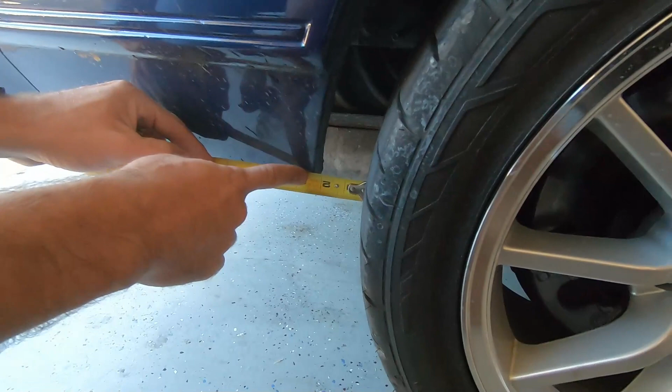So we're going to go over the diagram real quick and tell you how everything adjusts, what angles and whatnot. But first, before we go to the whiteboard, we're just going to measure the back axle real quick and make sure the angle of the axle from this way to that way is good.

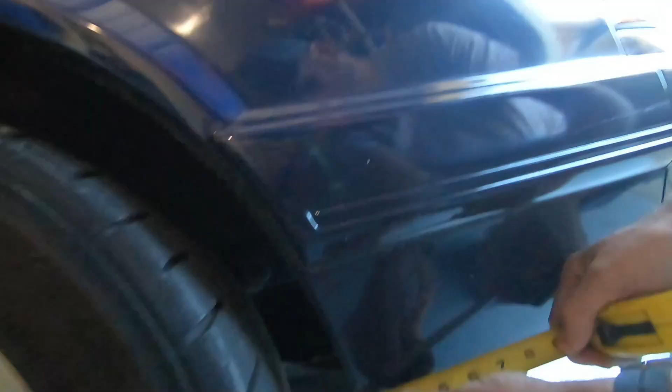I don't know if y'all can see this, but right here we've got exactly 2 1/4 from the tire to the end of the lip here. We're going to go down right where the end of the curve starts here. So we got 2 and a quarter. Let's go check the other side, Connor.

Hello. Okay, come over here, Bubba.

Okay, right here Connor, the same spot. Hey look at that, we also have 2 1/4. So just basing off these two reference points, the axle is not twisted like this.

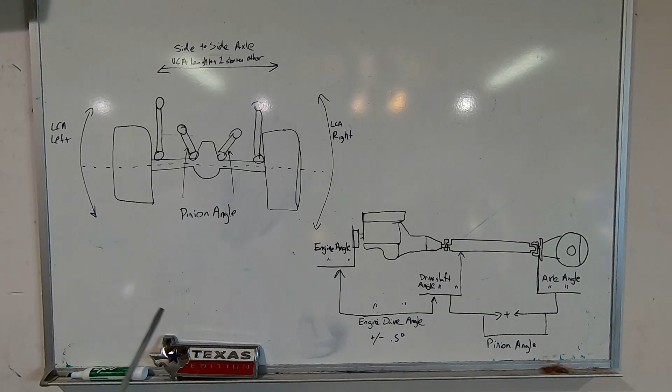Also know this, because whenever I test drove the car, the steering wheel was perfectly centered. That measurement is going to change rear steer, and of course you don't want that — you want your axle centered. My steering wheel didn't move. If I would have bolted this in and gone for a test drive and the steering wheel was cocked a little bit more, I probably would have known my rear axle was turning.

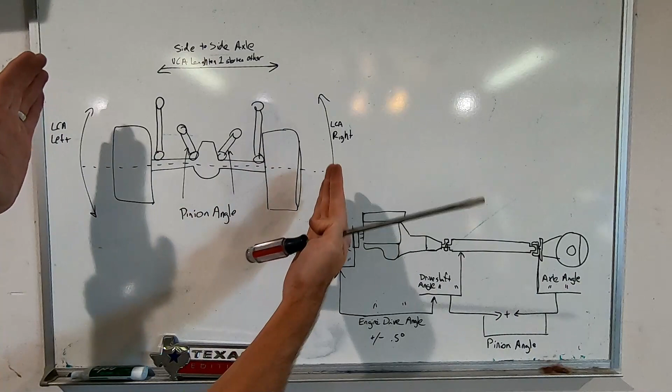Let's look at the diagram. Okay guys, I drew this on my whiteboard to help explain the upper and lower control arm adjustments and what they actually adjust, before we get into the pinion angle. So let's look over here on this side.

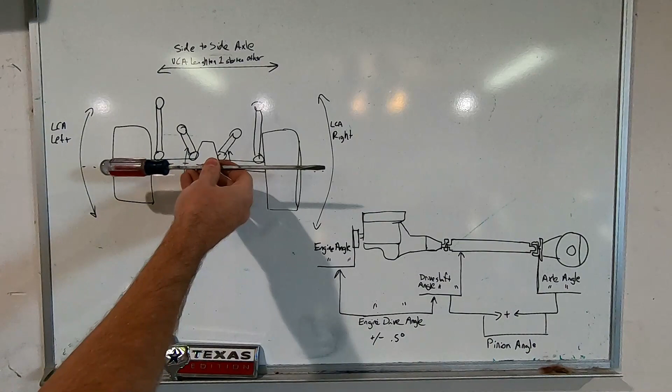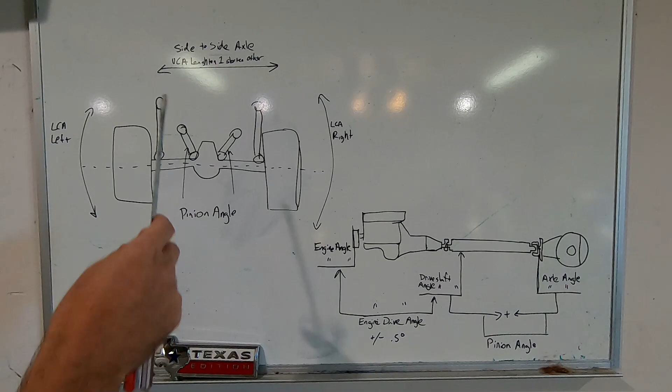Right now, just keep in mind that your lower control arms control the axle being forward or backward, centered into the fender well, and it also affects what we just checked as far as the axle being spun like this. If one is shorter than the other, this back tire will be moved up. If this is longer, it'll move down, and vice versa. So having these lower control arms equal length will make sure it is equal side to side into the fender wells.

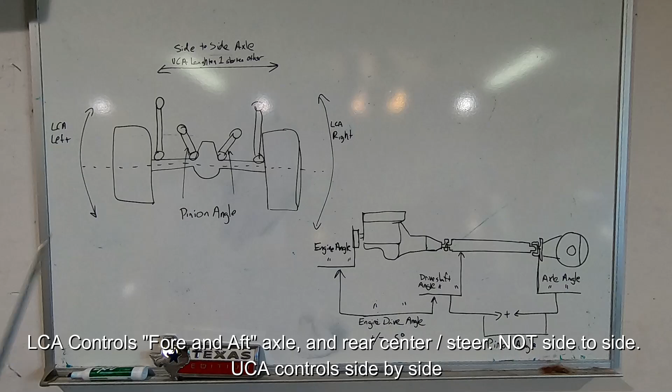If you have to actually adjust this axle, let's say you've got tire poke coming out on one side and it needs to come out on the other, you would lengthen and shorten the upper control arms in equal amounts. So your upper control arms control this movement and your pinion angle, and your lower control arms control this movement and this movement of the axle.

So mine seems to be pretty good, and I think we can go ahead and move on to the pinion angle. What we're going to do is chock the front wheels, lift it up, and take all these measurements. The first thing we're going to do is check the engine angle versus the drive shaft angle — this tells me our drive angle. This should be set to 0; you should have no play, or at least no angle between your transmission and your drive shaft.

Now I take the engine angle off the crank pulley because I know the crank is center line with the transmission, and the transmission is center line into your drive shaft. So there's a bad drawing, but this is actually a straight line from the crank straight to your rear output shaft on your transmission. So when we check the engine angle versus whatever your actual drive shaft angle should be, it should be around 0, if not give or take maybe plus or minus 0.5 degrees.

Once we get this and we're happy with it, this can be set and altered a little bit by shimming the transmission cross member to move the tail of the transmission up or down.

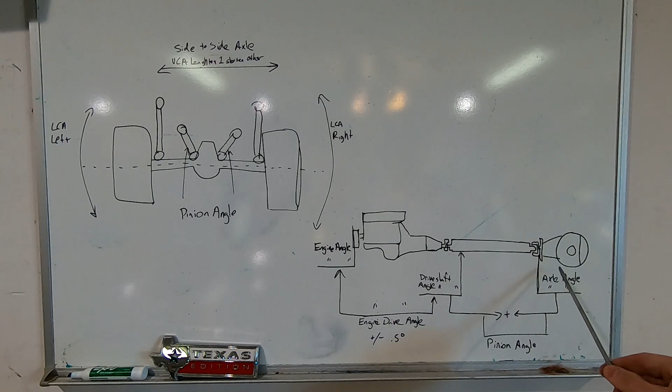Or of course you could actually raise and lower the engine mounts to lift it like this as well. We'll get this, and as long as it's within 0.5 degrees, we won't have to worry about this anymore. We can move on to the drive shaft angle.

Now with the car up in the air, we'll probably have to take the drive shaft off the rear axle just to get a flat spot to measure the axle. This will give us the axle angle, and we'll take that plus the drive shaft angle, add them together to give us our total pinion angle. Make sense, Connor? Yes, that does make a lot of sense.

You got this? Okay, let me show you the tools we'll need to check this, and then we're just going to raise the back of the car up.

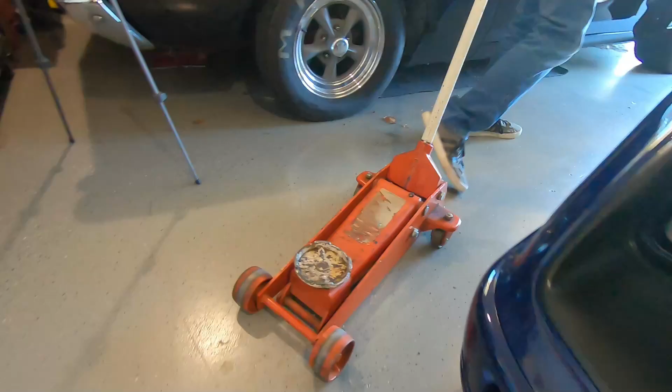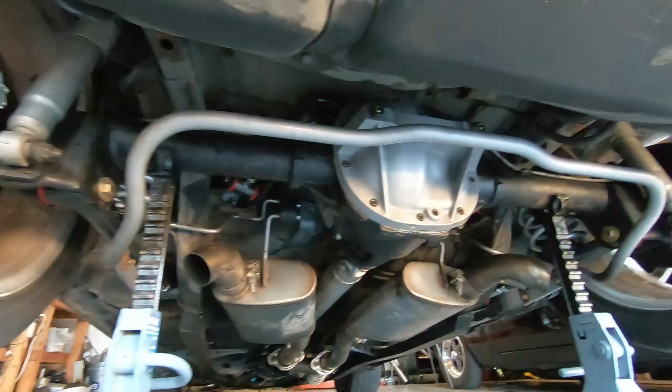For this job, you'll need angle finders, an old angle finder and a newer digital angle finder. To adjust the control arms, you're going to need a 1 inch wrench and a 1 1/8 inch wrench.

Most important thing here is to chock the wheels, because we don't want the car flying into the garage. Yes, this is my wheel chock.

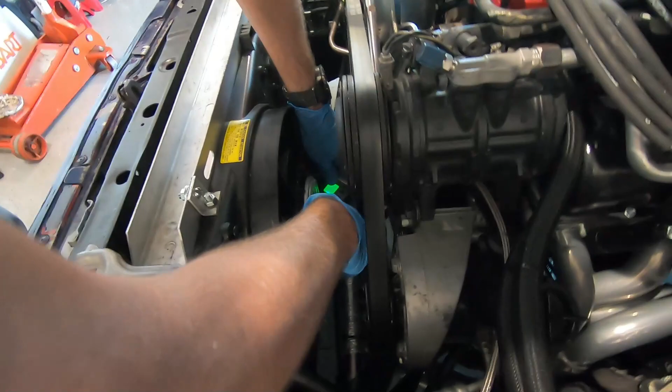Now let's get the jack. Oh! I did not do that. Broken. Oh come on man, dang, come on.

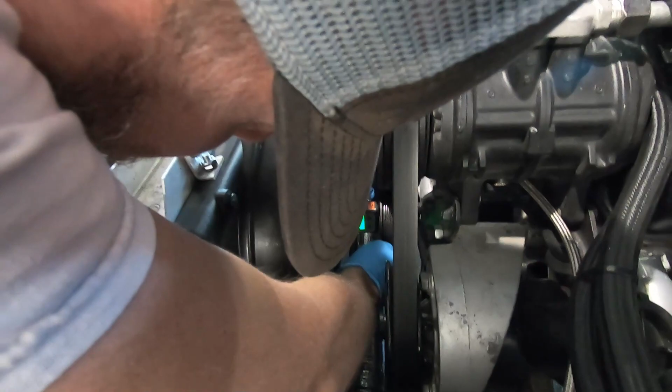All right, move back. Connor, we got the axle up, we got it lifted up here. I didn't get it too high, just high enough where I can get under it and get everything I need. I just noticed a leak over there, what is that? But anyways, we got this thing up.

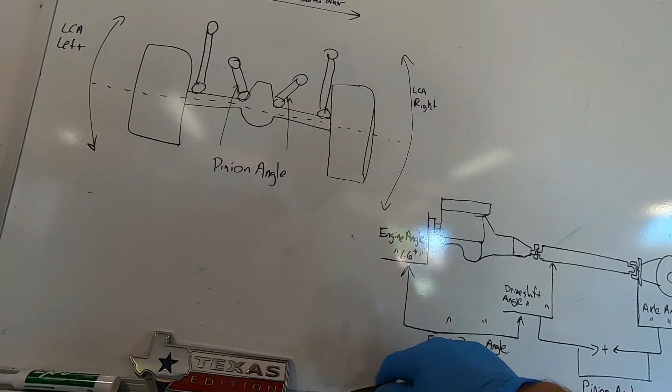First thing we're going to do is go ahead and get our engine angle. So what I'm going to do is put my ruler flat bar up against the pulley here, try to find something short enough because the turbo pipe is definitely in the way, and then get our angle off the crank pulley here. So let's do that right now.

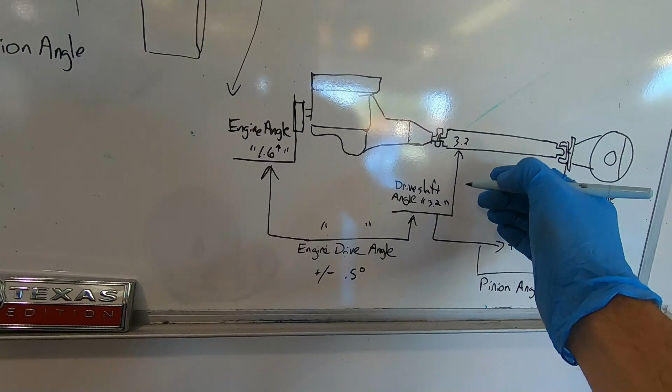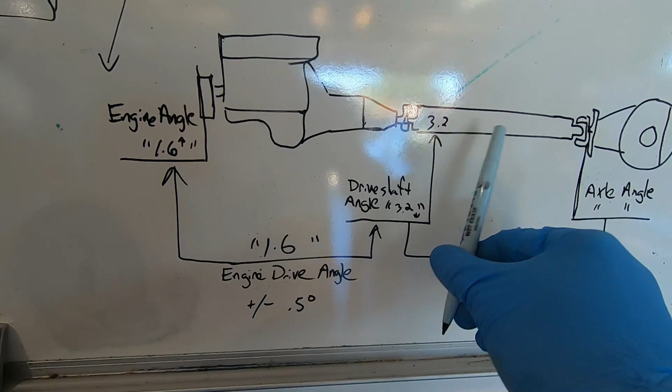I'm going to take my angle finder here, it has a magnet on the back side, so we'll turn it on and slide it in place. It's kind of tight in here, but we should be able to get in there doing this. That green light's cool, all right buddy.

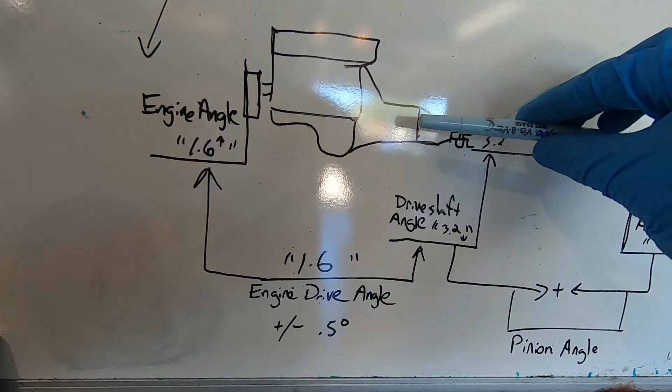So this is without zeroing out, and what we got is 1.6 degrees. Let's see here, make sure that's right. 1.6.

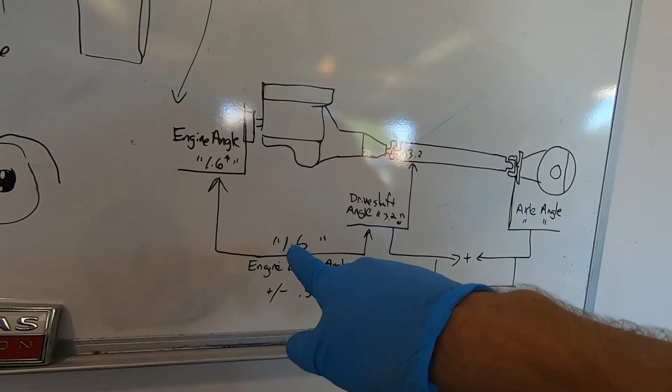Okay, so we got 3.2 on the drive shaft. So we're going to go over here. This is the 3.2 positive. Okay, so we got 3.2 degrees on the drive shaft, and 1.6 is up, so we subtract it, and we've got 1.6. I also verified this using my digital angle finder, zeroed it out on the engine, then transferred it to the drive shaft, and it showed 1.5. So 1.5 to 1.6 is what we're going off of here. I'm going to just say 1.5, just to round it up I guess.

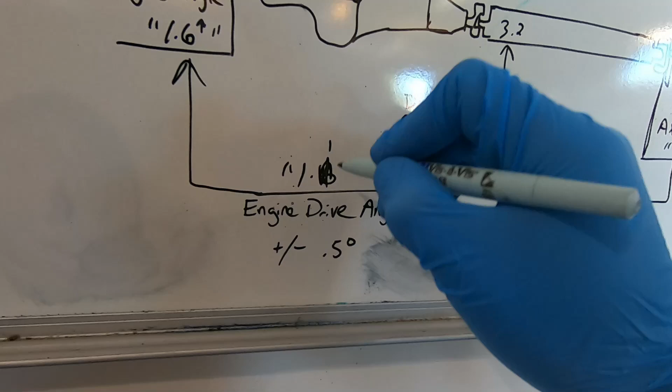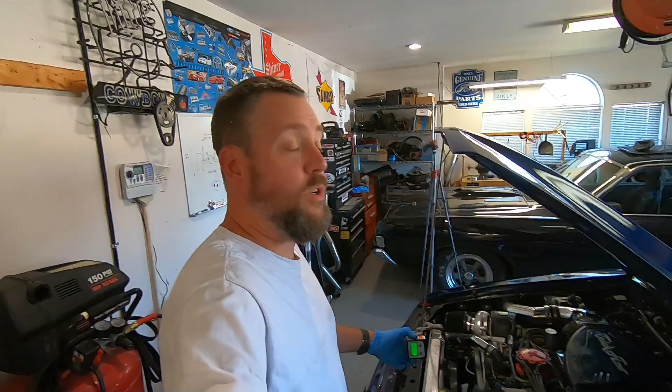But what this means is the drive shaft angle difference between the two is 1.5 degrees. So I could actually shim the cross member to try to zero this out. All right, I've got the transmission just lifted up enough. I'm going to slide one washer in it, put the bolts back in, tighten it back down, and check the angle again. I think one washer will get us the angle we need, I don't need to be moving it much.

What's up guys, and we're back. Where we go eat? Jambo's. If you know what place that is, comment down below. And you watch way too much YouTube, stop. You should go check out Jambo's, it's good. Jambo's and Rendon barbecue.

We had to take a barbecue sandwich break, but I'll put one washer on, which brought up the back end.

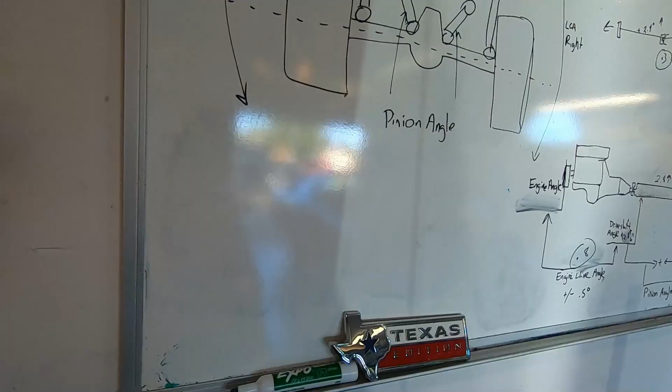One set of washers stacked on brought me from 1.6 to 1.1, which means one stack of washers brought it down 0.5 degrees. So I think if I can get another stack on there, that would be two stacks of washers, and that would actually get us down to about 0.5 in the driveline angle.

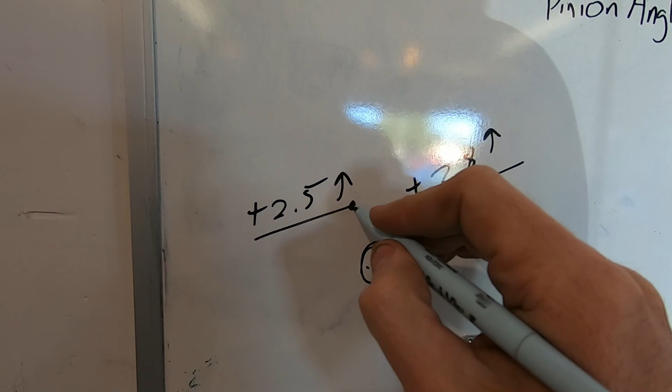So I've put the washers on the cross member to the transmission, and I went ahead and put my angle finder down on this thick metal ruler, along with the crank, and zeroed it out. So now everything else is going to be referenced off the degree of the crank. So if we come down here and put this on the drive shaft, that'll tell us where we're at.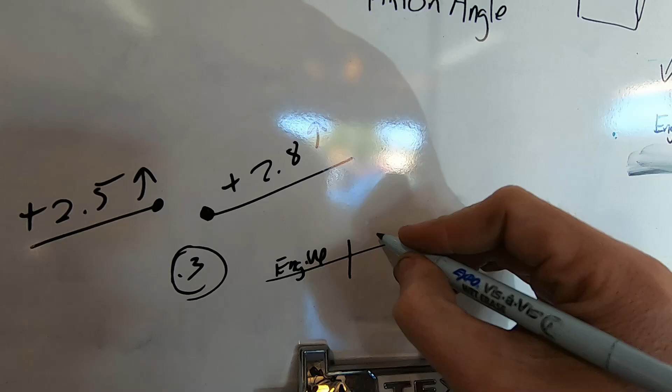0.8. So to make this really simple, all we're doing right now is just checking the driveline angle from the engine to the drive shaft and making sure it's as centered as possible.

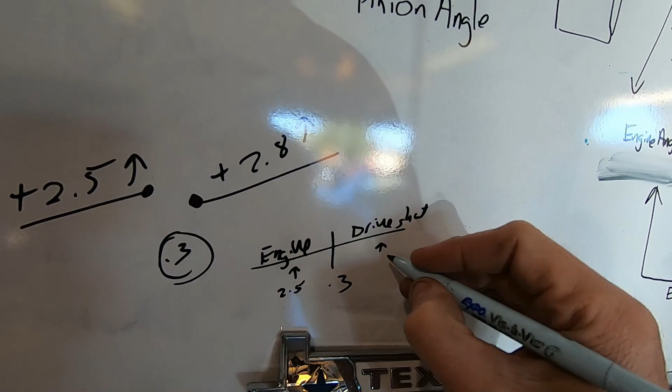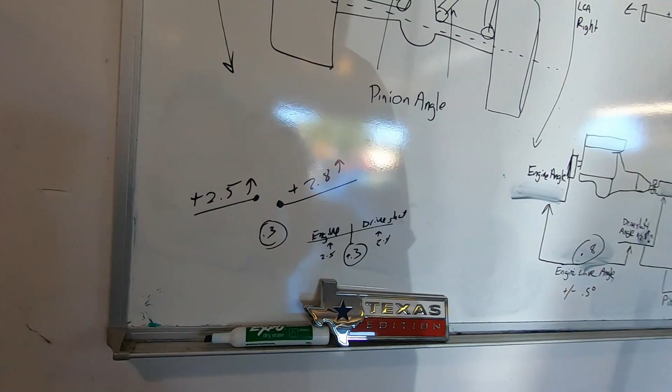So what I've done is measured the car. If we're looking at the side of the car, we know the whole car is angled up like this because the back end's jacked up. The engine angle right now is 2.5 degrees positive, meaning it's an upslope. The drive shaft is 2.8 degrees positive, also an upslope. Normally this would be a downslope since the car wouldn't be jacked up on the back end, but you take these two differences and get a 0.3 degree drive angle difference in the center.

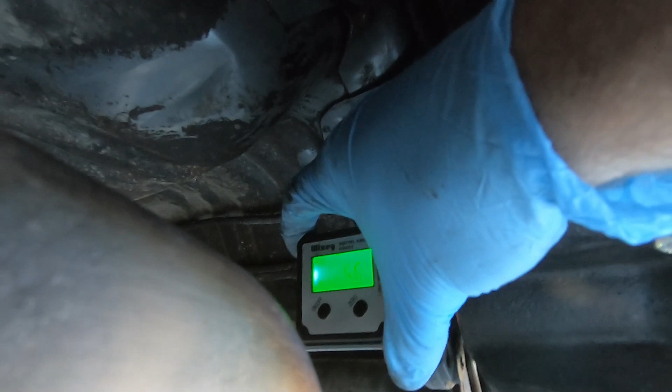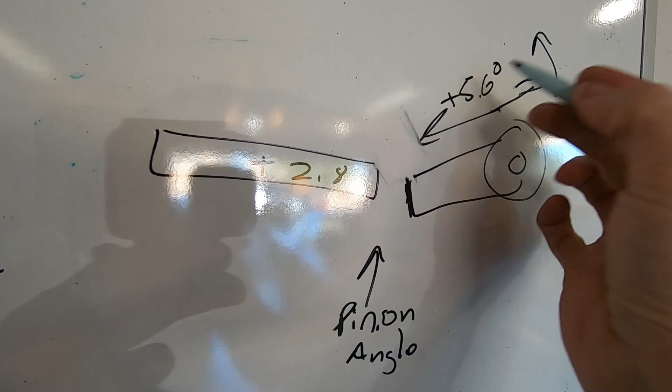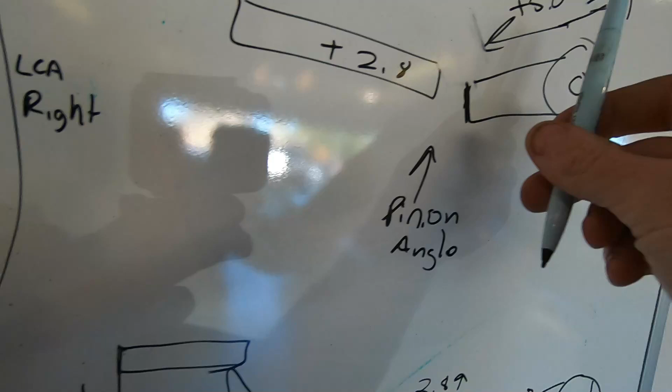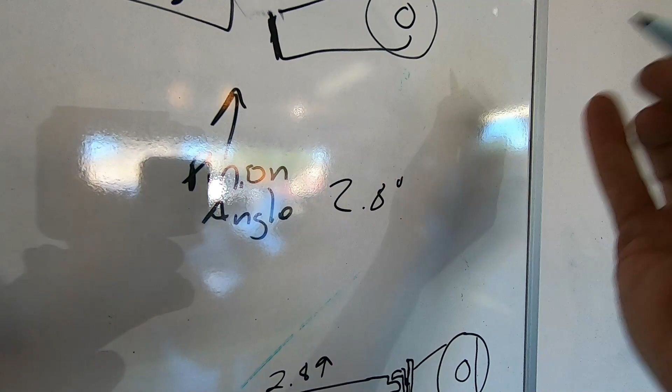That to me is really close to zero, and it's perfect, almost dead center. That just means our drive angle and the angle of the drive shaft, where they meet - and again this would actually be a straight line - between the engine and the drive shaft is just a 0.3 degree difference, because they're both at nearly the same angle, 2.5 up and 2.8 up. So being this is up more, it's still a positive 0.3 degree up angle. Nonetheless, that's awfully close, and we can easily continue on with the pinion angle, which is what you're here for.

All right, I got my drive shaft removed. We're gonna turn on our angle finder here and just put it up there. Okay, we have a 5.6 up.

So bear with me here, but because the whole car is lifted up, we have a plus slope up angle on the drive shaft of 2.8, like we measured earlier. And we had an up slope angle measured at the pinion at 5.6 degrees. So you take the difference between these two, and that makes our pinion angle 2.8 degrees difference. So when the car is down, this will be a minus 2.8 degree.

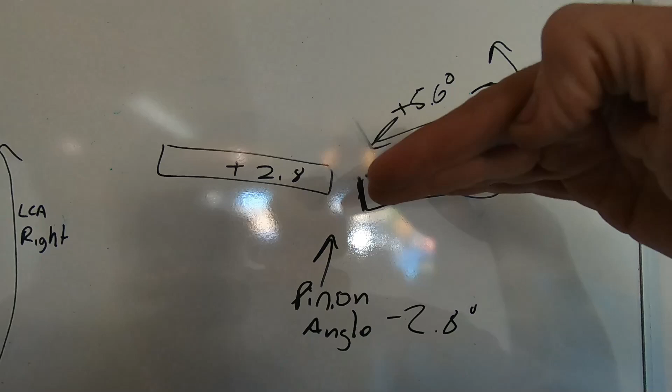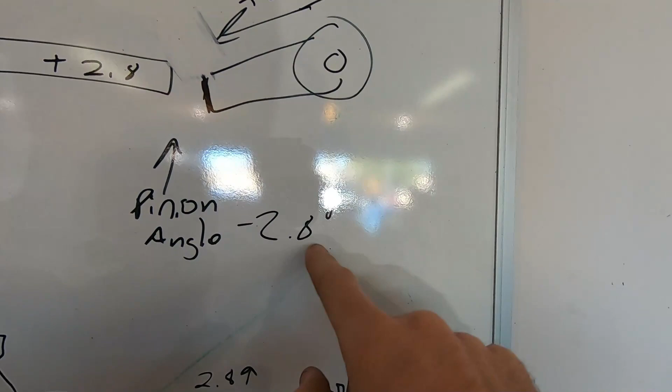And just to verify - because I'm confusing myself, since the car is angled up so high, everything is a positive degree because the whole back of the car is up. If the car was level, all this would make more sense in my head. It's confusing the hell out of me, so I actually went online. Come inside with me real quick and I'll show you - I used an online calculator to put all my measurements in just to verify I was right. Let's check it out.

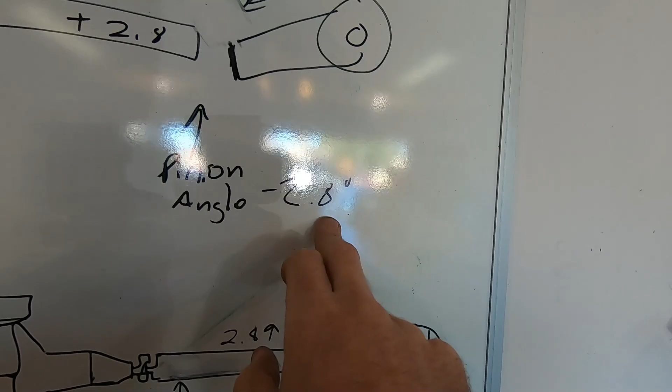Okay, so here I am on spicerparts.com calculators. You can just Google pinion calculator, there's a whole bunch of them out there, but this is what we have. This makes sense to me, this is what I got outside too.

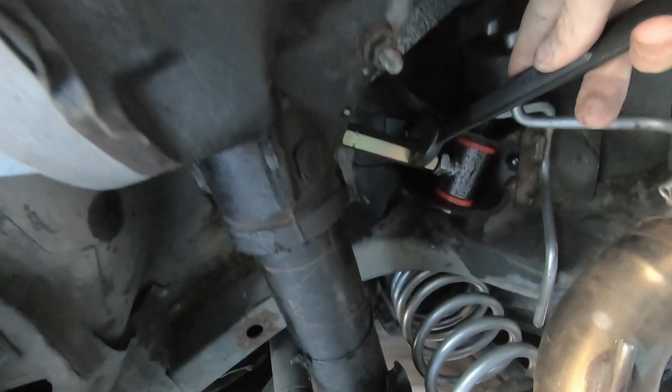We're at 2.8, so it's a little aggressive. It's closer to 3. I think I want to tighten it back up, which means we need to bring the pinion up just a little bit more and make this right around 5.3 degrees. That'll give us a 2.5 degree pinion angle, or if I go a little bit more, that would be okay. So even if we bring this in maybe 5.1 or 5.2 degrees, that's going to get my pinion angle right around what we want, 2.2 to 2.3 degree range.

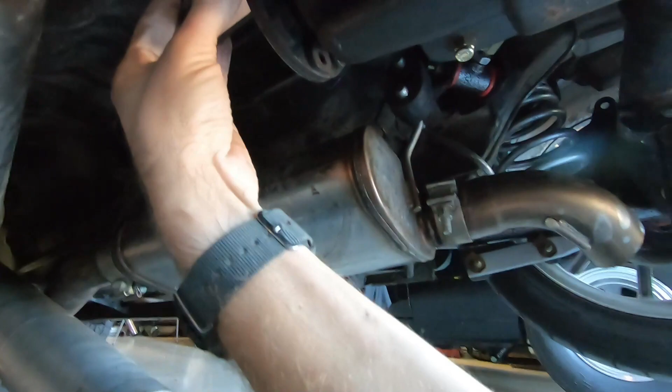So we're going to loosen our jam nuts. Okay, so what we're going to do is take our 7/8 inch wrench. Actually on a 1-inch wrench, and it was too big. So for the adjustment nuts here, we're going to count the flats.

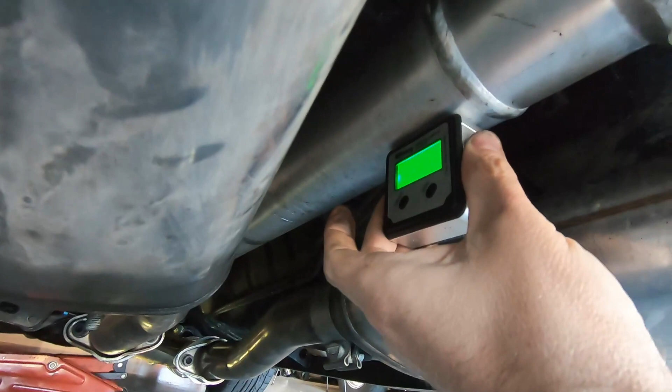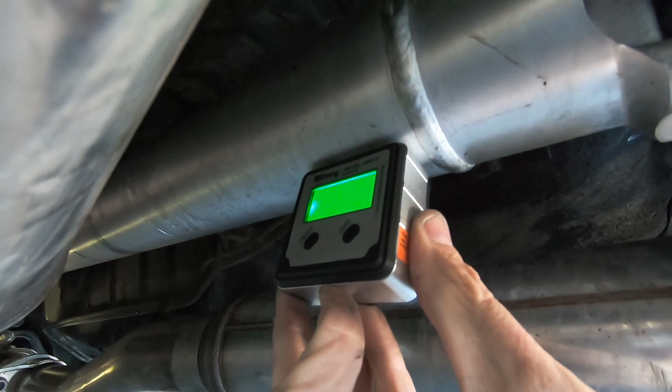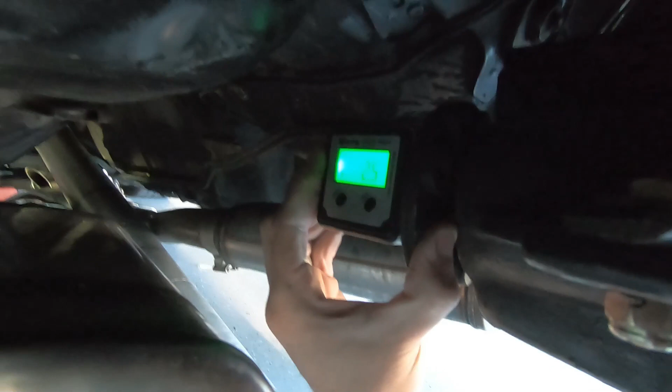What that means is we're going to make sure we turn both of them the exact same amount. I'm going to go 1, 2, 3, and the same here. 1, 2, 3. And then we'll get our angle finder and try it out here again.

Okay, so that is the wrong direction. Now we've got 3.2 pinion angle. Okay, so I need to go back the other direction here. Now we're at about 2.6. I got the right direction going here. I was going the wrong direction.

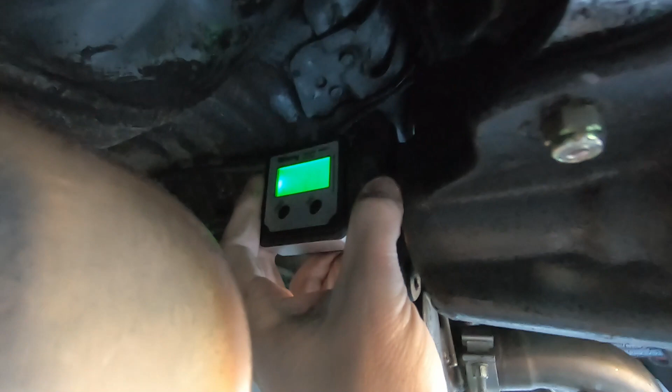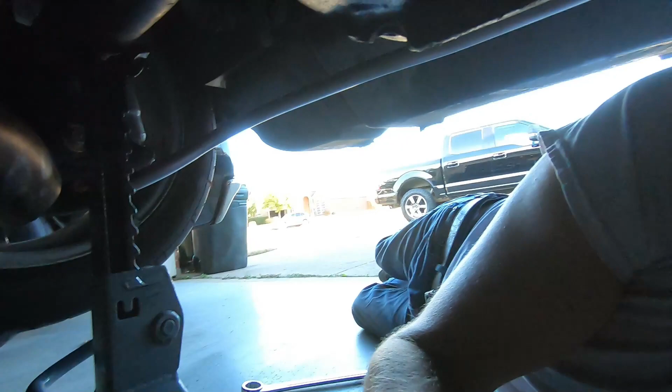What I did was reference my angle finder to 0 on the drive shaft. So put the drive shaft back on here like this. And I put the angle finder on here and zeroed it out. See, so it's 0.1, it was 0.0 a second ago. So 0.1, 0.0, so I zeroed it out on the drive shaft. Now we'll have direct reference to the drive shaft angle and pinion angle. So that being 0, this is 2.5.

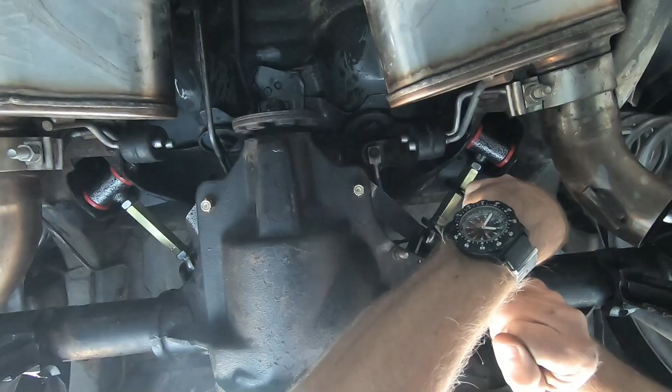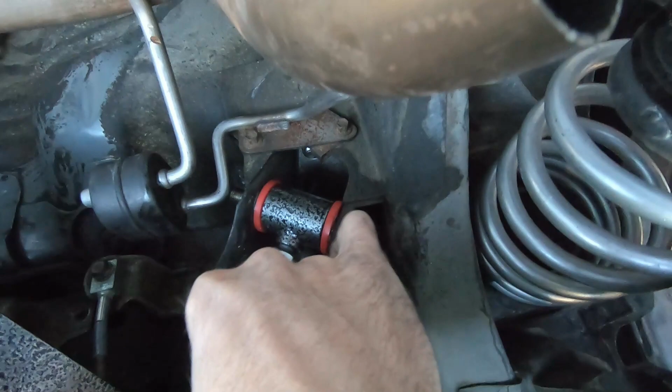So I'm gonna go a little bit more maybe and lock them down, but I think that's good. So we'll just maybe go 1, 2, 1, 2, and we'll check it again here.

All right, 2.3, 2.4. So I'm gonna call that good. They recommended between 2 and 2.5 degrees pinion angle. I went ahead and got it to 2.3. So now we're just gonna lock it down. So what we need to do here is just spin our jam nuts back up finger tight.

Mark reference this thing on both sides. Okay, that'll just kind of give you an idea whether or not it's backing off.

Okay, got it outside. It's kind of cold outside. It took a little bit to warm up. You can definitely hear my ticking. That tick is the passenger, or driver's side exhaust header leak we got to fix. But it has a completely different sound with the tailpipes cut out.